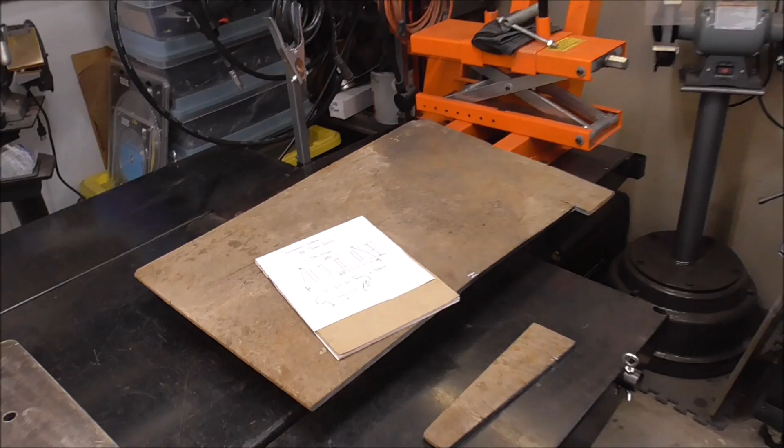I'm going to try to keep this build really user-friendly, using the minimum amount of tools so that you can get the most amount for your investment. So pretty much the tools we're going to be using for this are a welder and a plasma cutter. I'm going to have a set of plans and I'm going to upload those onto Facebook. These aren't them, but I'm just kind of showing you a sketch of what I've got.

Roughly how big it is, 20 inches across the back, 23 across the front. We're going to have some slices in it to let airflow come up through. It's going to have 3-inch sides, probably at about a 15-degree angle, but I'll have to verify that. And it is deep-wise 12 inches.

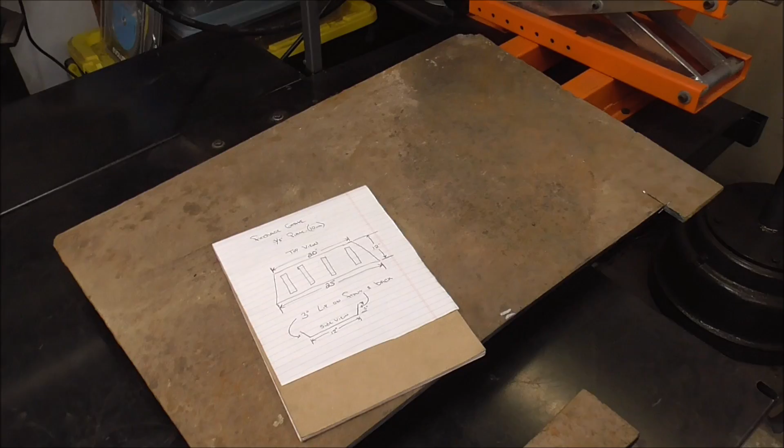You guys can make some pretty good money. Go online and Google fireplace grate. They range anywhere from like $30 for something cheap up to $750. So there's money to be made in these, especially if you can pick up some plate that is otherwise useless for something else. As you can see, this plate is all warped up. You can see how it's got a lot of bends in it, but that's going to be perfect for doing a fireplace grate like this because all it's got to do is hold fire.

I'm always looking for ways to show you guys different ways of doing something, things to think about, and maybe even some ways to make a little bit of extra money to better your circumstances. This could easily be made and sold online. Like I said, some of these go for $750. And there are people out there that are willing to pay for quality that don't want to have to deal with replacing their fireplace grate every year like I have to do.

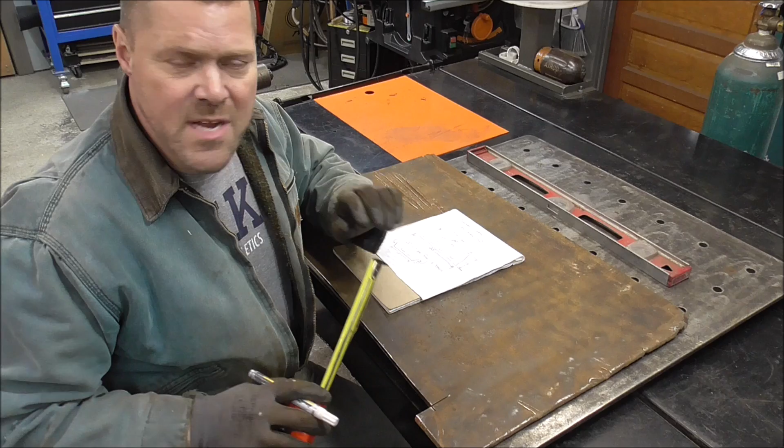Let's get going. As we do this project, I'm going to show you the tools that I would use to get the most amount of money out of these if you're going to build them, or the way to do it that will cost you the cheapest. Basically, you're going to want a plasma cutter and a stick welder. That's going to be the best way to do it. The consumables for a stick welder are the cheapest, and it's going to work great for this because it's 3/8.

If you decide to use a MIG welder, you're going to have to do this with a 220 volt machine because this plate is 3/8 thick. A 120 volt machine just really is not cut out to go past 1/4 inch, and that might even be pushing it with flux core. So that's why I say a stick welder is the best way to do it. You could do this with a DC buzz box, or you could do this with an inverter stick welder, using 6010 or 6011 rods depending on which welder you're using.

So for visuals, we'll get this thing laid out 23 inches. We'll make a mark there, and we'll make a mark on this side. Now I'll just use a straight edge and connect the two. And then it's going to be 12 inches deep, so we'll put a line across that way. 12. We'll get all our pieces cut, then we'll do all our welding.

These are also great projects, guys, if you're starting out welding with very little liability. There's not a whole lot of liability in building something like this. If your weld cracks or if it fails, nobody's going to get hurt.

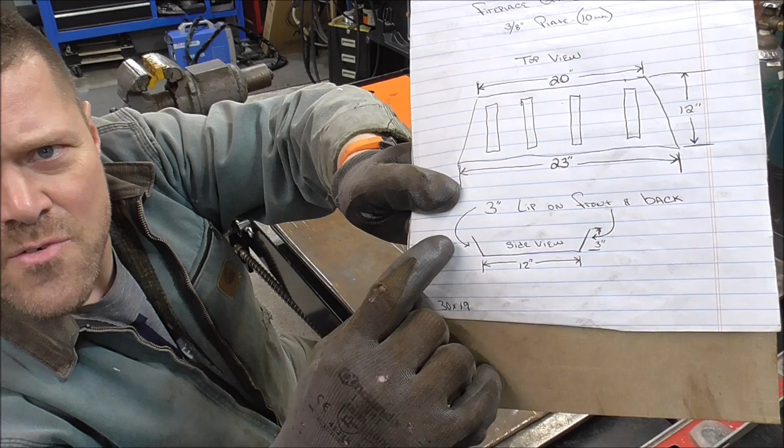So this will be the bottom of our fire grate. These will make up the sides because these little lips right here need to be 3 inches tall. So that'll be two 3-inch strips out of this. That'll go at probably a 15-degree angle, but we'll have to figure that out.

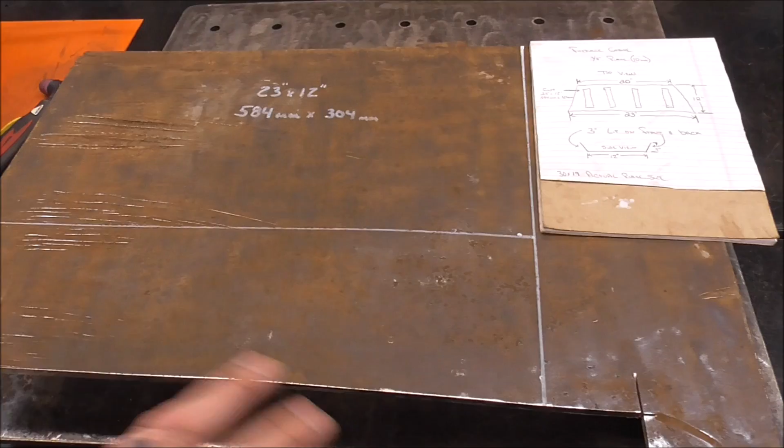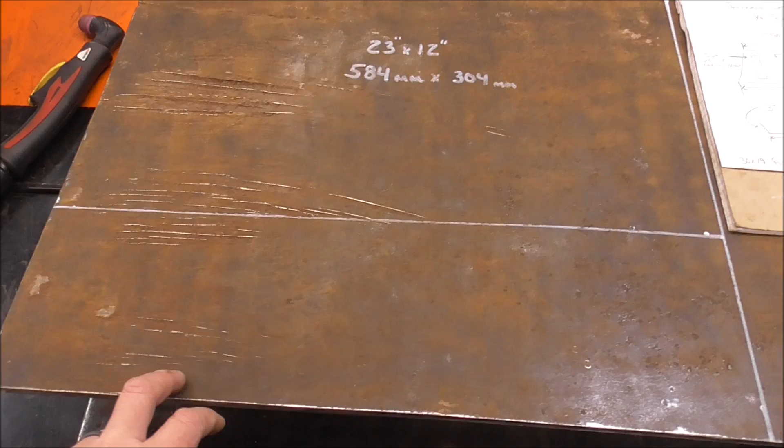And when I upload these plans, I'm going to make it so that you really don't have any waste. So if you have to either buy the plate or you look for it, you'll know the minimum size that you need. And we're going to try to minimize how many cuts we need to make, because obviously the fewer cuts that we make, the longer our consumables will last, which means that we're going to get more out of our consumables and make more money.

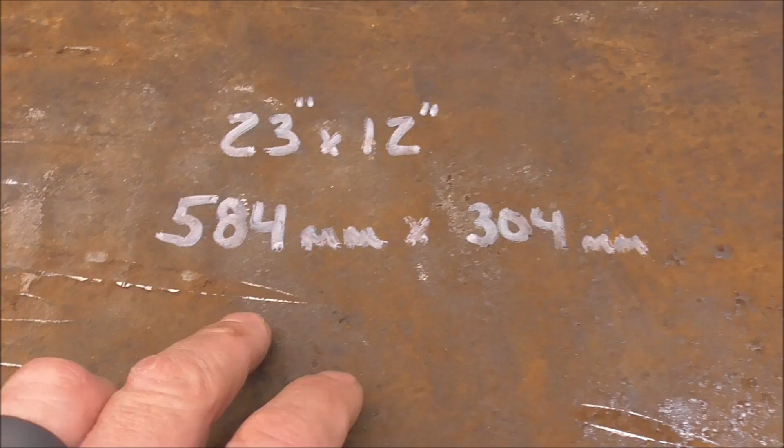First thing we're going to do is I've marked out how big this plate is. So it's 23 by 12. That's our first piece that we're going to cut. And that's what it converts out into for metric. And then that leaves us about 6.5 inches left over approximately. And we said we wanted each of these like 3 and 3.

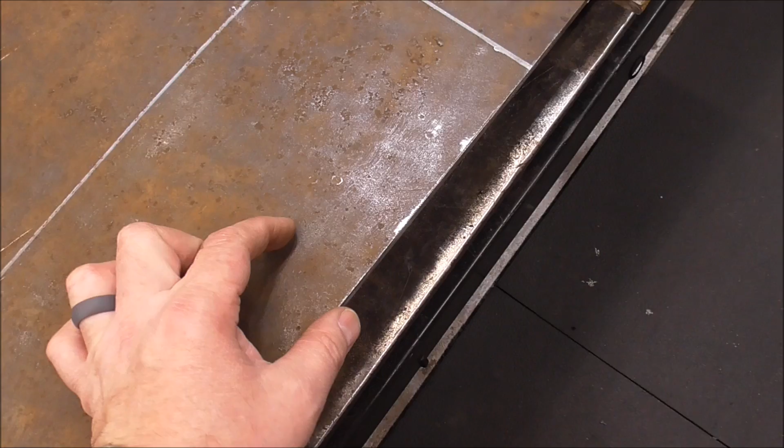What we're going to do is we'll make this cut first, and then whatever this is, we'll just divide it right down the center, make one cut, which will give us 2 pieces, and then that'll be the angled side, one for here, one for here.

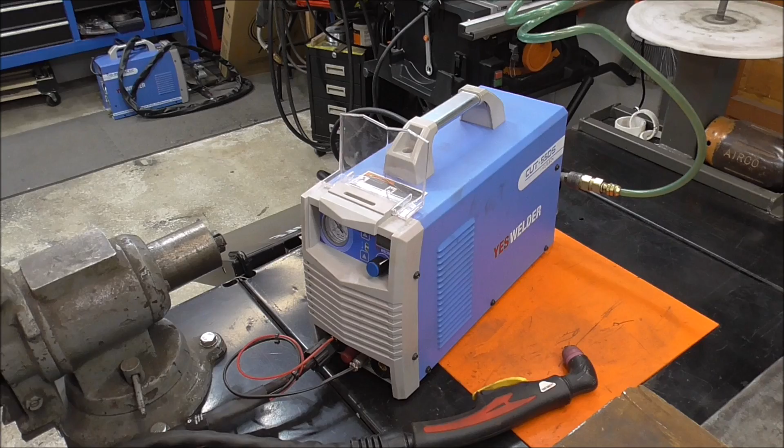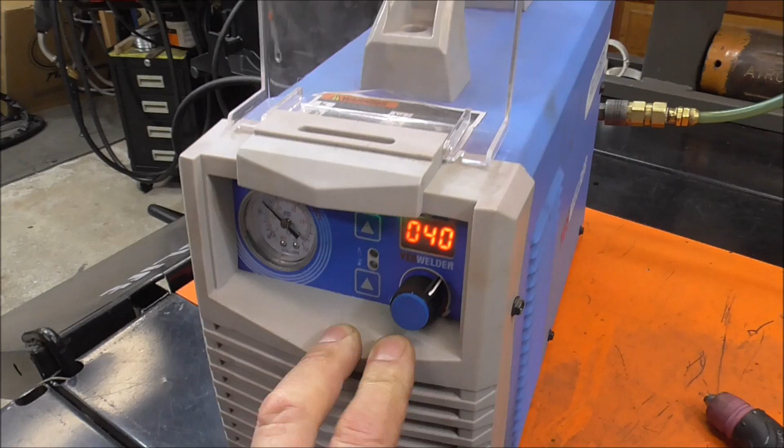Now we need to set this machine up for the correct air pressure and for the correct amperage setting. Just like you wouldn't take a cutting torch and max it out fully for sheet metal, you want to do the same thing for this because it maximizes your consumables.

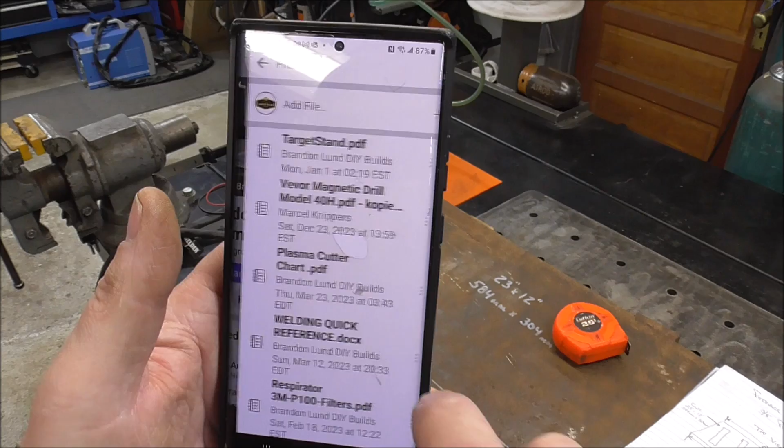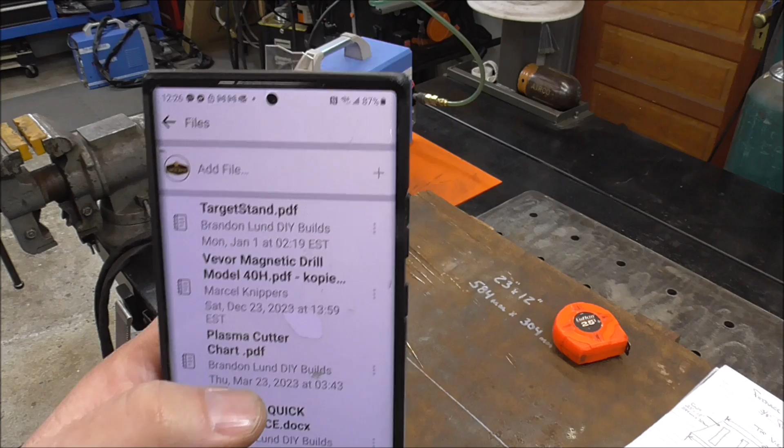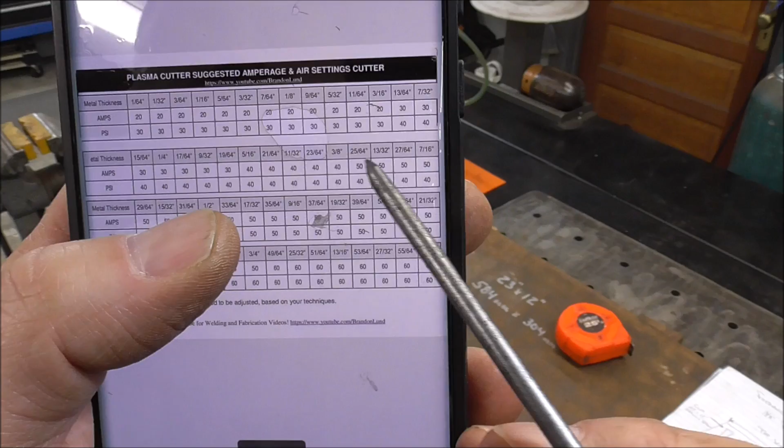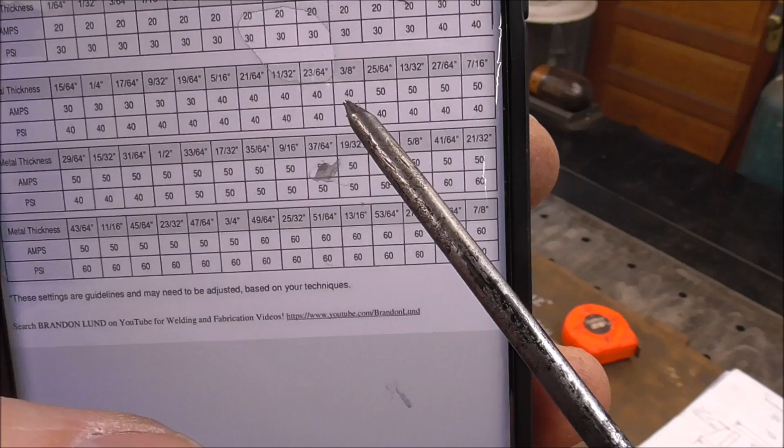What you're looking for is the plasma cutter chart. You're going to go in there, click on it, you're going to download it. Then you're going to go into the folder wherever you keep your downloads and find the material thickness that you're working with. For us, we're working with 3/8, so you can see we need to set it for 40 and 40, so 40 amps, 40 psi for 3/8 metal. And you come over here and you can see we're already set for 40 and 40. That'll just help preserve your consumables.

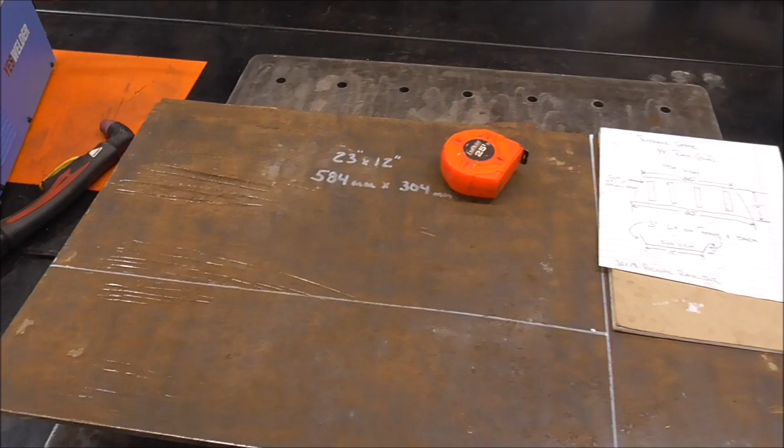In last week's episode, I showed you that I used a 7 1/4 inch circular saw with a metal cutting blade to cut this plate steel, and it cut just awesome. And that's good if you're going to do just a few cuts. If you're going to make a lot of these, I'd recommend a plasma cutter because, in my opinion, a plasma cutter is pretty much the ideal tool for cutting plate. And it's probably one of the cheapest ways of doing it because the only thing you're buying is consumables after a while.

So you've got, you know, $265 invested in this machine. You're going to need a few consumables. It helps to have really dry air with a plasma cutter.

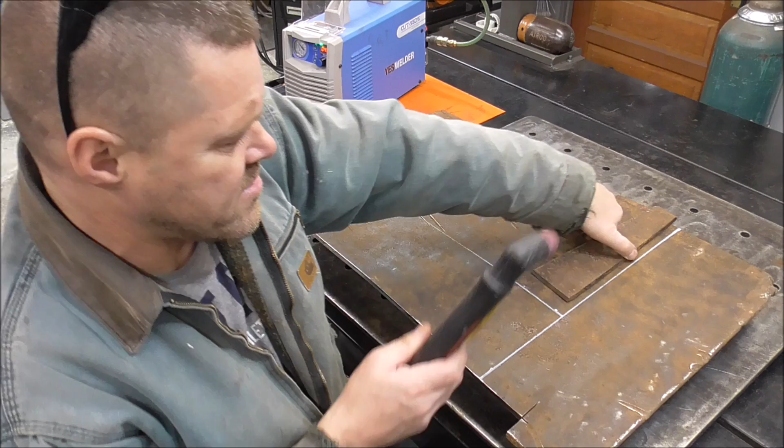I'm going to put on some cutting goggles, and I also like to use a shield just because sparks fly, and you're going to want welding gloves. And you're also going to want a respirator because it's not good to breathe in these fumes.

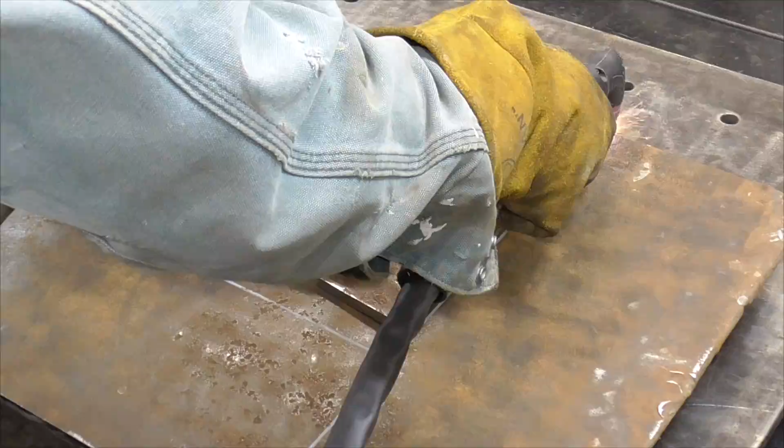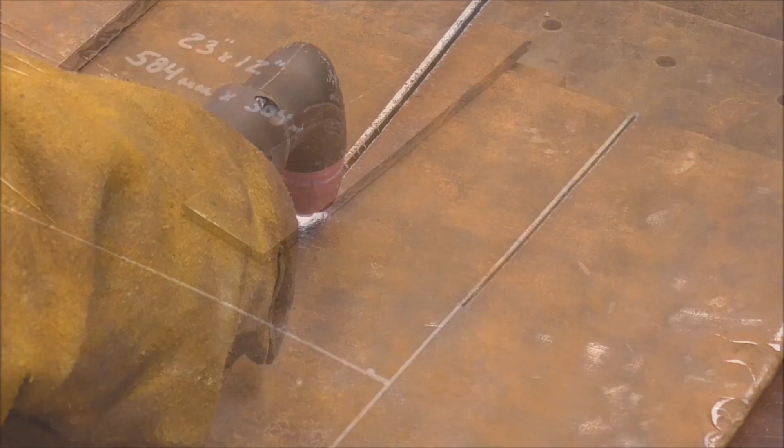I wanted to stop this cut real quick and show you why I took that spacer off. For one, this plate is super bowed like I told you, and it was making the gap higher and higher as I started sliding it down. But look at the kerf. So the kerf is real wide right here as I slide it along, and then look how thin the kerf gets right there. And the reason for that is that's where I was dragging it.

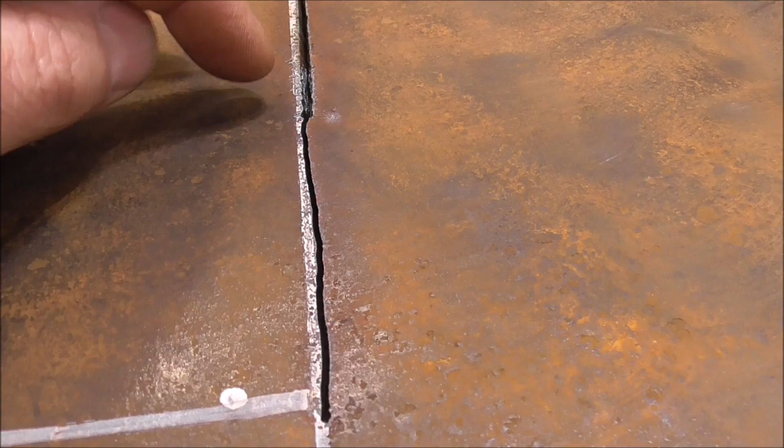By using that spacer and having it off the metal a little bit, it's acting like the metal's actually thicker. So the machine is not piercing it as cleanly. So I'm going to drag it because I'm getting a faster, cleaner cut. If this plate was a lot flatter and it didn't have all kinds of bows and waves, this would be a good way of doing it using the straight edge, but this plate is just too jacked up to do that.

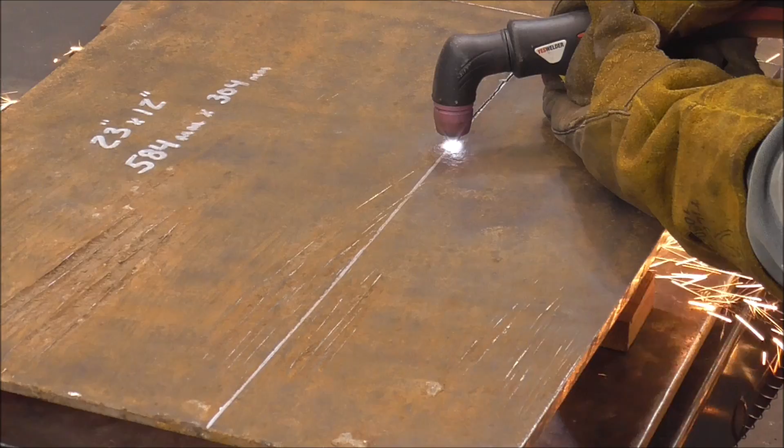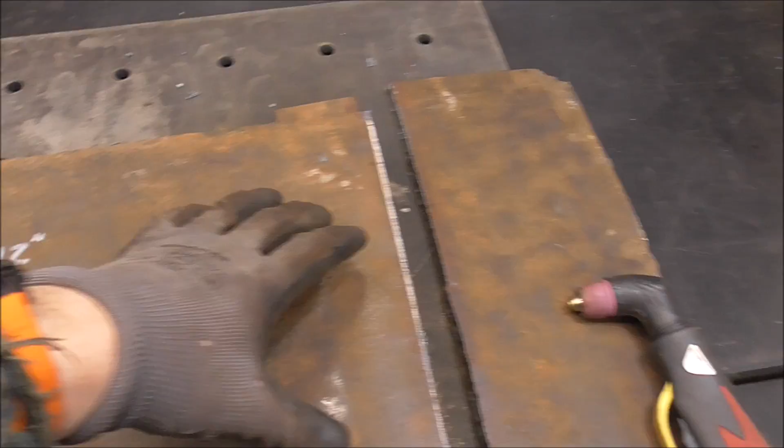So here's our bottom right here of the fire grate. Then it's going to have the squares cut out, and we'll do that eventually. And then here's the scrap. Now we're going to take this scrap and just cut it right down the middle, just to make things nice and simple. It reduces the cuts that we got to make.

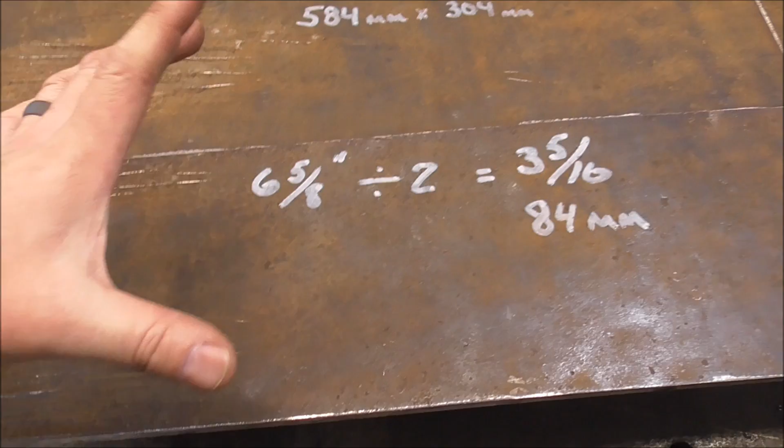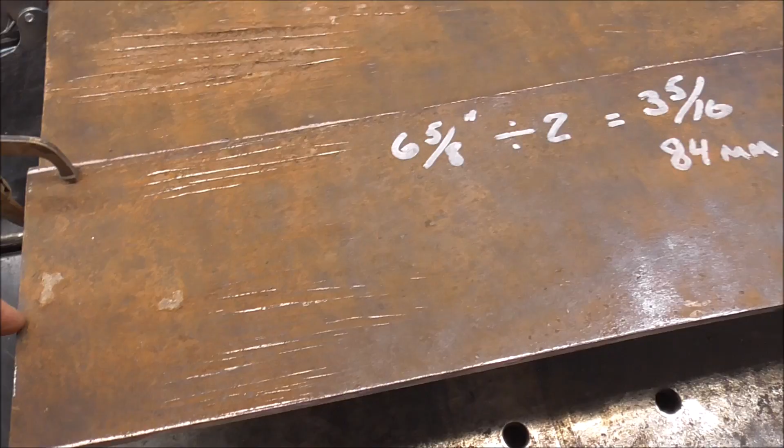The scrap that we have left over is 6 5/8 wide. Divide that by 2 and that gives us 3 5/16 or 84 millimeters. So we're going to put a line at 3 5/16 or 84 millimeters, draw it right down the full length of it, make one cut with the plasma cutter, and that'll be both sides.

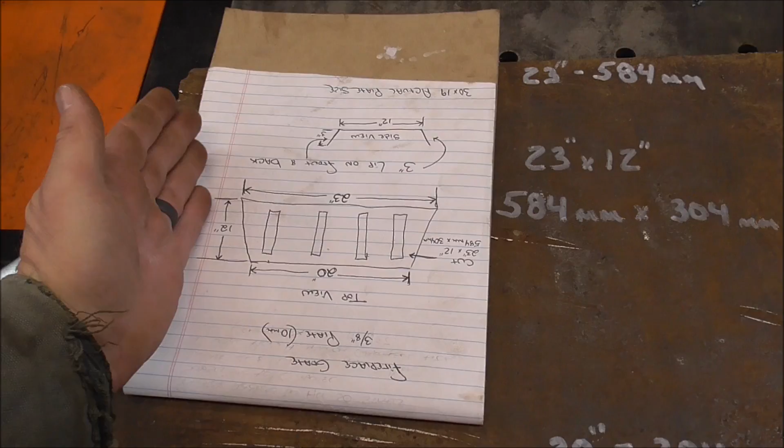So now we've got our 2 strips cut that are both 23 inches long or 584 millimeters. Now we're going to go back to the bottom of our plate for our fire grate. So this is how we're looking at it right now. We got 23 inches along the back right there, and we need it to be 20 inches along the front. So to get that measurement, we're going to come in 1.5 inches and make a mark, which is also 38 millimeters. Do the same thing on this side. Come in 1.5 inches, 38 millimeters.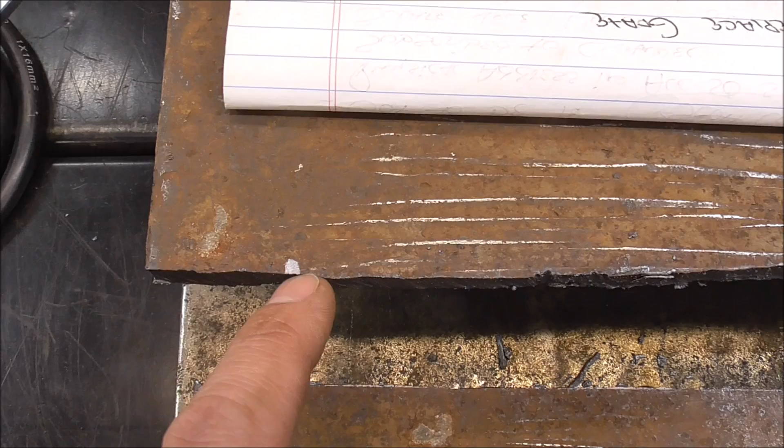Then we're going to draw a line from here up to that edge. That'll give us that taper that we're looking for right here and right here. And then we'll have to make one of these plates right here 20 inches long to match what this will now be. This will now be 20 inches inside to inside, or 304 millimeters.

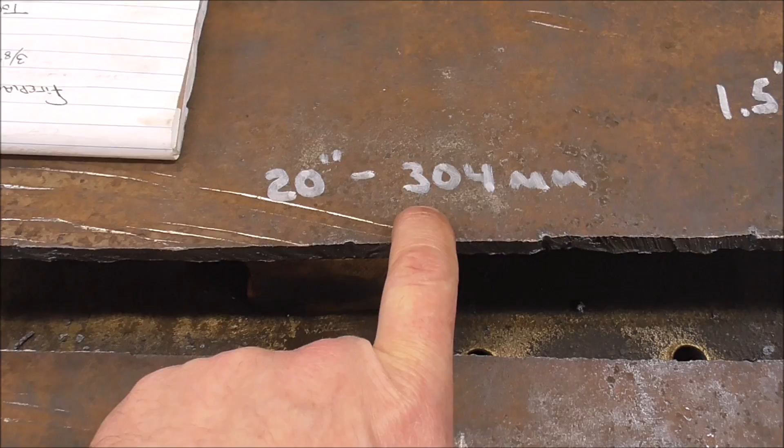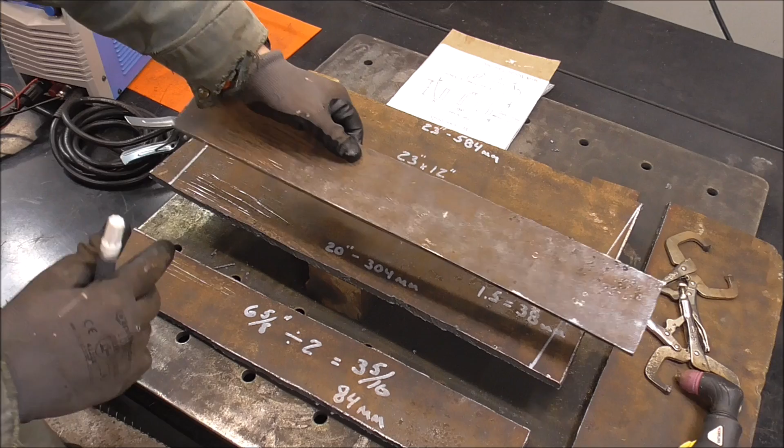And while we're doing this cut and this cut, let's cut that to length as well. So we know that it's going to stop there, it's going to stop here. So let's just hold it up, put a mark right in line with this mark here on the plate, and we'll cut this off straight across right there.

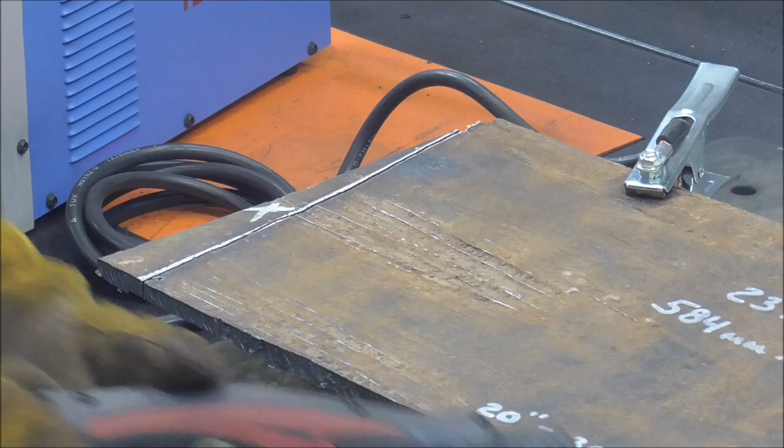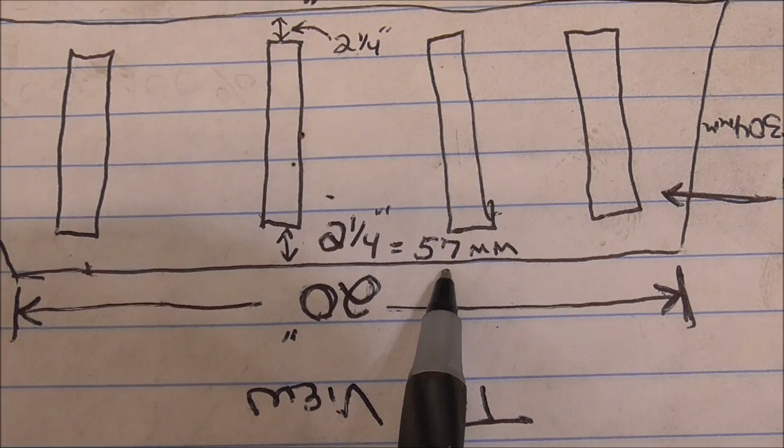Now we need to put in the slots onto this plate. So we need to know, where do they begin and where do they end? Because obviously you can't go all the way to the end, because it would cut it in half. So I'm going to use 2¼ inches or 57 millimeters. How'd I come up with 2¼ of an inch? That's the width of this.

This line that we just drew with that level, from that edge, we're going to come in 2 inches. I'm going to use a piece of 1.5 inch wide square tube as a template. Okay, and that's what I'm going to trace out. Those are going to be my slots.

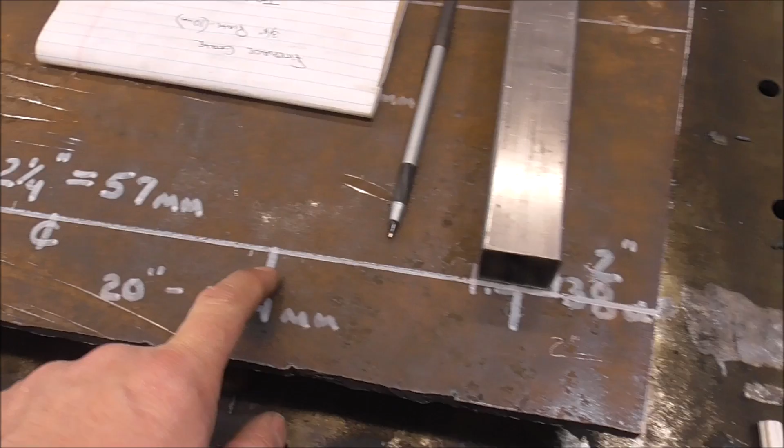Okay, so from the center of this tube, we're going to make a mark every 5 inches. So it would be 5 inches, which is also 127 millimeters. Another 5 inches will be the tube, then another 5 inches. So that'll give us equidistant slots all the way down through this.

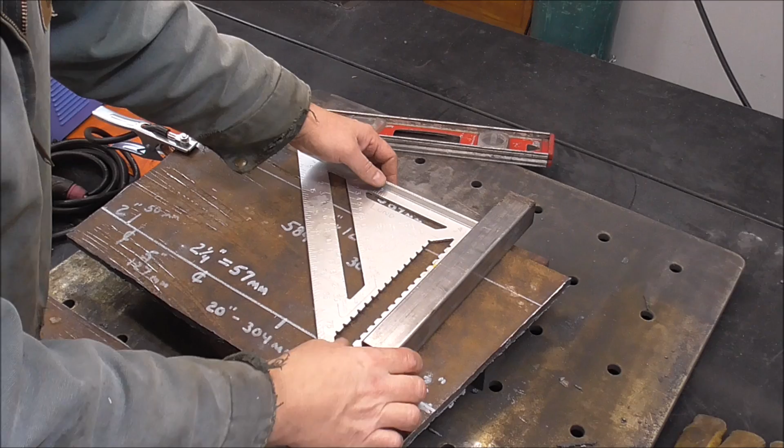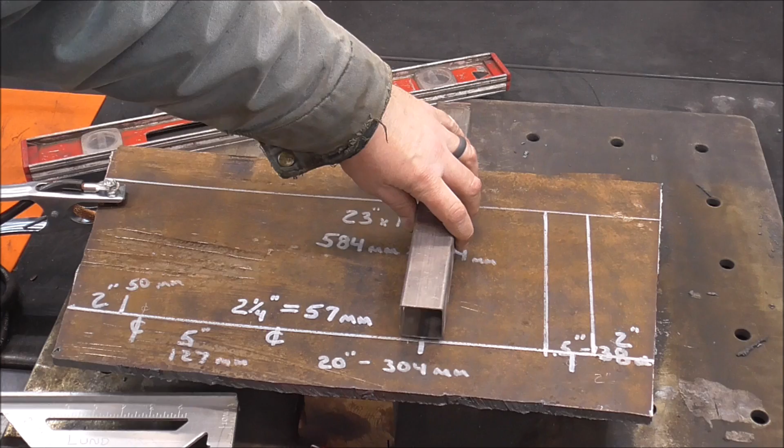And to keep my line somewhat straight, we'll use a straight edge. I'll bump it up against this plate right here. I mean, they don't have to be perfect. Like I said, this just has to hold fire, right? Check it for 2 inch, that looks great. We'll move this over, line it up here to my center mark, which is 5 inches away from that. Put my framing square on it. You can see I gotta come over a little bit, and there we go.

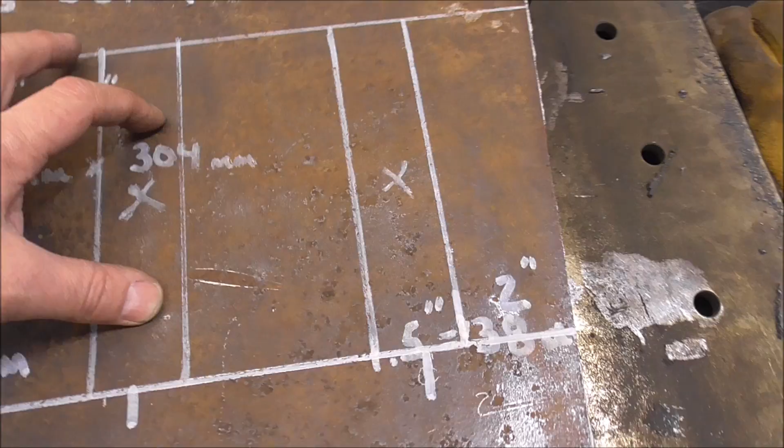And now, just like all the others, we're just gonna cut out these slots. Cut out that, that, and that. These could actually be cut up and made into legs if you wanted to, and maybe we'll do that. I haven't decided. I kind of was just going to go for some square tube just for the looks, but I don't know. Maybe we'll just keep it really inexpensive and use these cutouts for the legs of this.

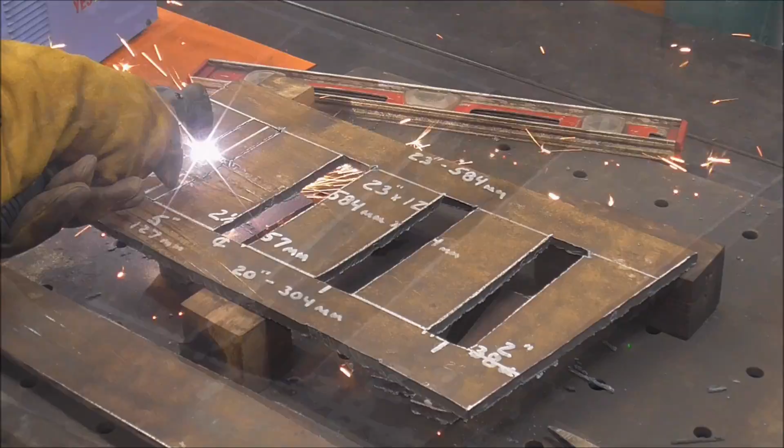So we're ready to start welding. We still have to figure out if we're going to use these pieces that we cut out and use them for legs. I'm leaning towards that. I actually think it would look pretty good if we did, and it would be cost effective if you guys are building them. You see this on here, this little ridge that's all around?

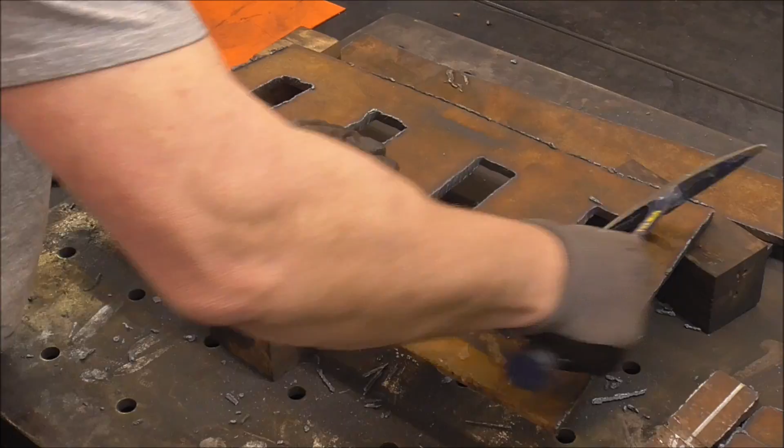That's called dross or slag, and what we've got to do is knock that off, and that comes off really easy with a chipping hammer. And that's all we've got to do to get ready to weld is knock off this dross. And you can see, watch how easy this is. Hopefully you guys can hear me okay because I'm wearing a respirator right now. What I'm going to do is go around and prep this edge so we can get it down to bright shiny metal so we can make our welds.

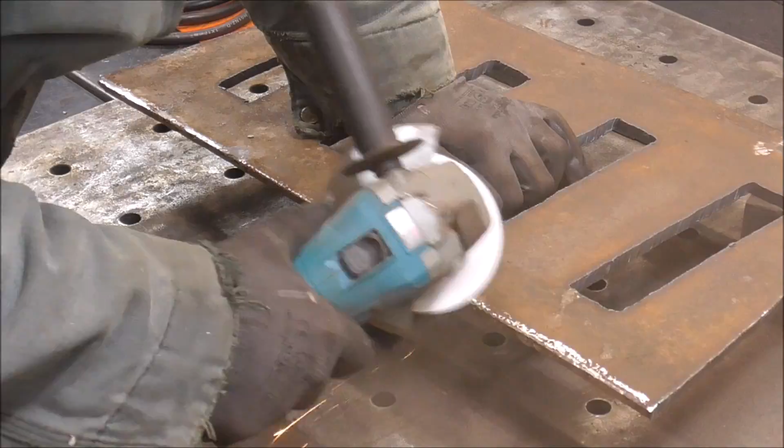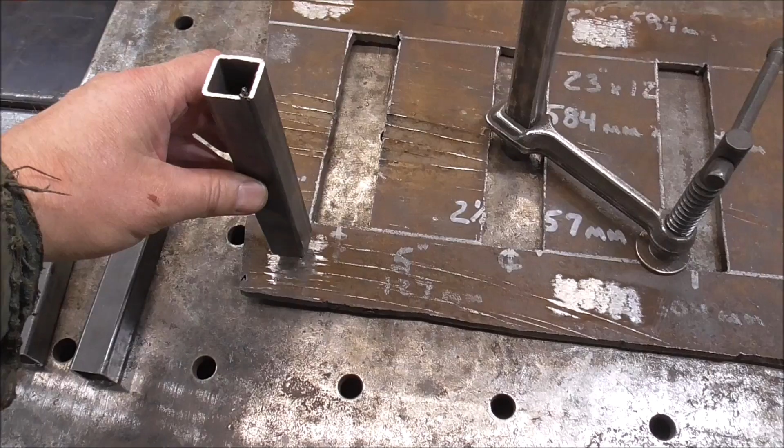I think you guys are going to like how we're going to do this next part. It's going to be pretty slick and it's going to save a lot of time. So these I am going to make into legs, but not for everywhere. I've got some 1-inch square tube laying around. So I'm going to do square tube legs on the front like this, just so it looks a little bit fancier. It's going to be short, so you won't really see them all that well anyways. And then where you don't see these, I'm going to put legs here, here, here, and then in the center of these ribs so they can't bow.

Then once we get the legs welded on, we'll get them all cut to length. That's where it's going to save some time. So I'm going to make a jig and it'll mark them all, because you can see, look how warped up this is. You can see this isn't even off the ground. This is like the thickness of my finger. It's not even flat. Then over here, it's touching right on that very edge. And then over here, it's even thicker. So what we're going to do is measure off our table and then just make a line and make it even all the way around.

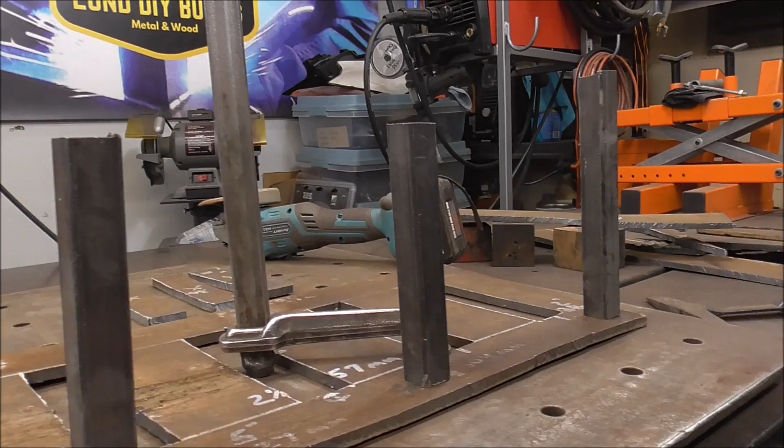I'll show you. It'd be pretty slick. As I said earlier, the most cost-effective way to weld this up would be to use some 6011 or 6010 rods with a stick welder. That definitely is the cheapest way to go. It's the cheapest way to purchase the welder, for one, and it's the cheapest consumable that you can get. The next, probably cheaper, would be to use a flux core welder.

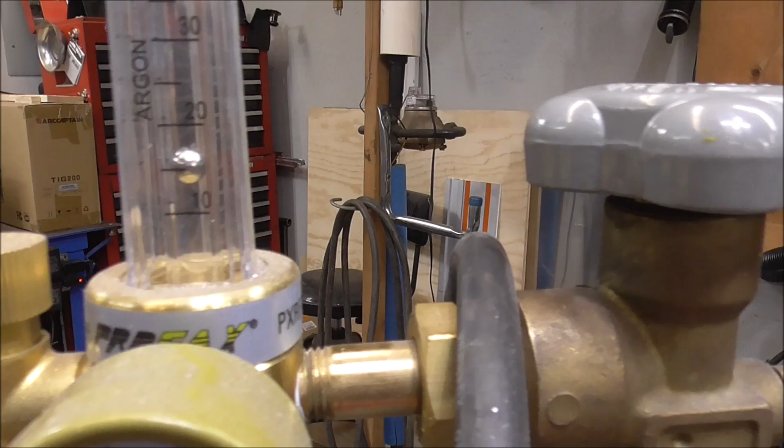But I'm not going to use a stick welding process simply because it's cold outside right now and I'm working inside. And as you guys know, stick welding makes a lot of smoke. If it was summer where I could open up the door and get more ventilation, I would definitely stick weld this. But it's winter time, so I'm actually going to MIG weld it. For CFH, I'm running right about 15. We're running at 194 amps or 555 inches per minute, 27.6 volts.

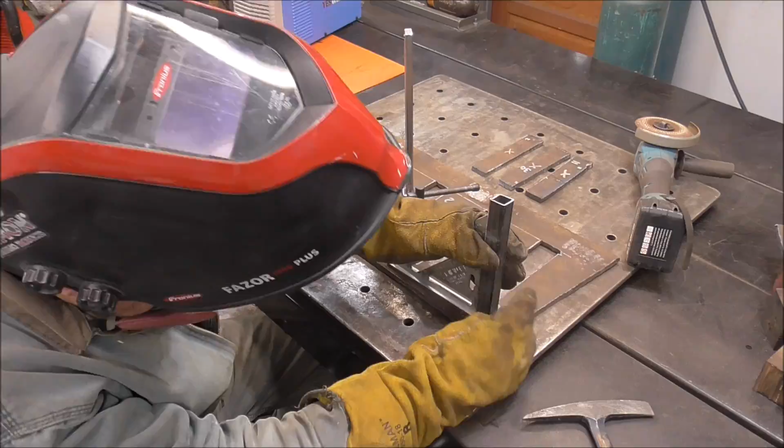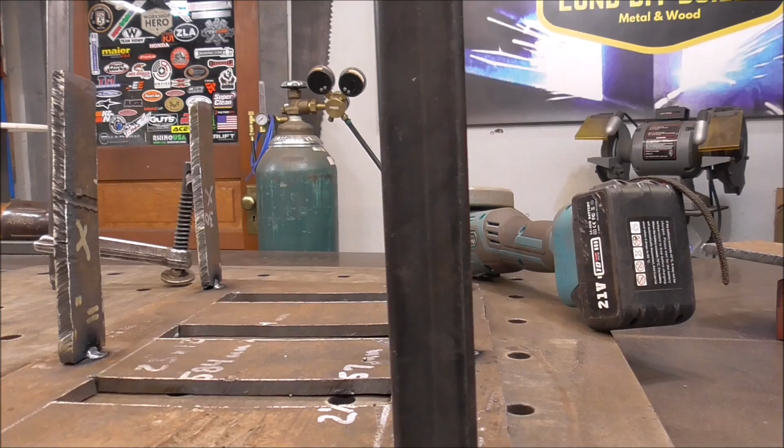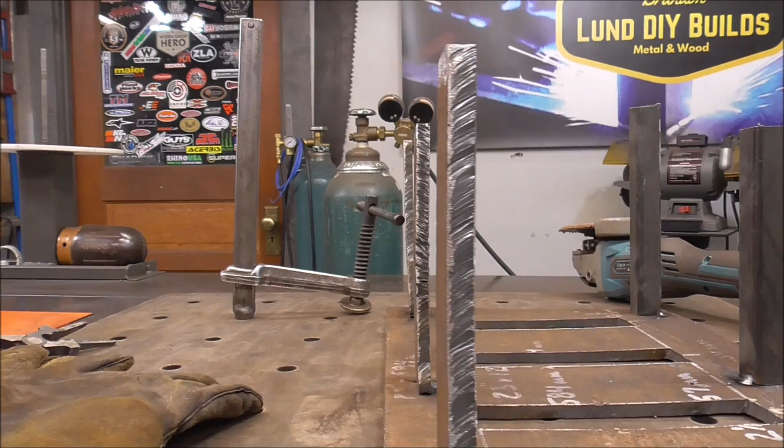Now these ones, guys, you're not going to really see. So you can try to get them as perfect as you want, but you're really not going to see any of them. Alright guys, these are the ones I measured. Look down them. Those are pretty darn straight for what it is. These are the ones I just eyeballed and guessed. Those are pretty straight too. So sometimes it really doesn't much matter, guys, as long as you get it fairly close. And the more you do this stuff, the better your eye gets anyways.

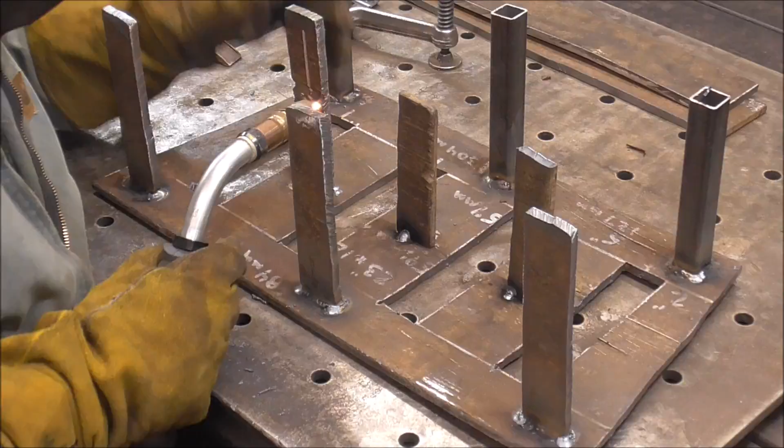So now let's put a tack here, here, and here, and then just a couple more tacks on those over there. Then I'll get these all welded out. Then we'll cut them off so they're all even. Now we're going to flip this over and we're going to weld on our ribs on the front and back. Then we'll cut our feet. That way if there's any warping or anything, it'll all have been welded, so it'll be warped to where it's going to warp. Get yourself a magnet and then you can do it this way. Just like that.

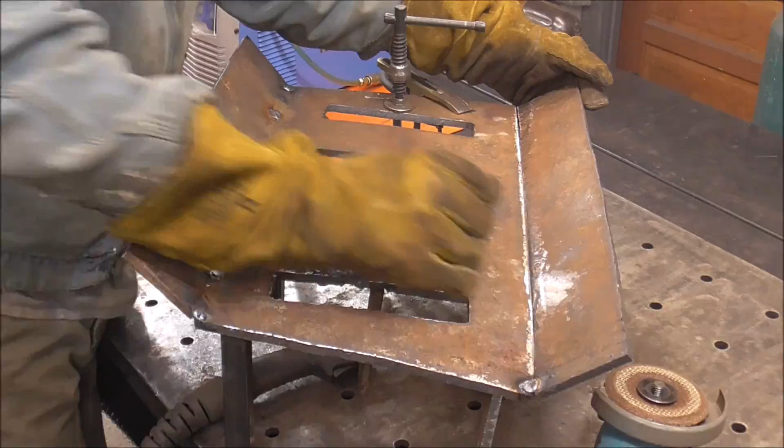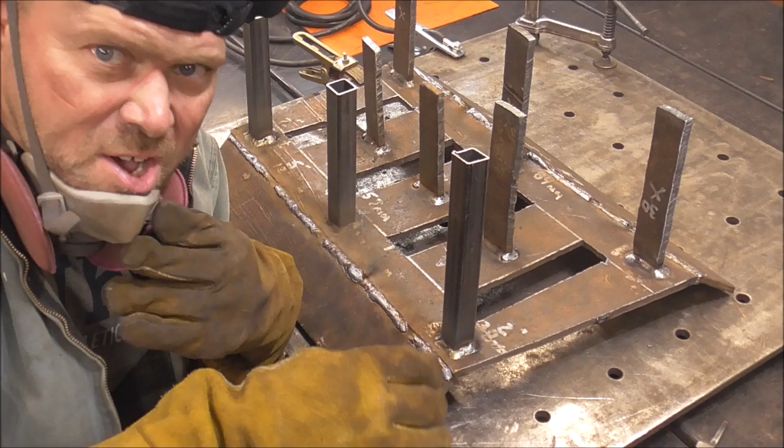Alright, all we've got to do is weld the back side and then cut the legs, and we are just about done. When we're all done with this, guys, and we get this all cut, I'll throw this on a scale. This is really, really heavy duty. We're all welded out, guys. Not the prettiest in the world, but you know what? It'll do. It'll work. And that's really all that matters. This side came out good. I got all kinds of wormholes and porosity over here. And you could actually hear it when I was running it. That's basically just trash inside there because I didn't clean it enough. But like I said, it doesn't really matter, guys. It's not the end of the world. This was a pretty rough plate.

If this was actually a nice flat plate and I had some good material to work with, I probably would have taken my time a little bit more. But I'm basically just doing this so I can have something for myself, and then I can make some plans for you guys and show you how to build one of these cost effectively and be able to make a little bit of money while you're doing it. Kind of looks like Stonehenge over here with all the different height legs. Now we're going to make them all the same, and I'll show you how we're going to do that.

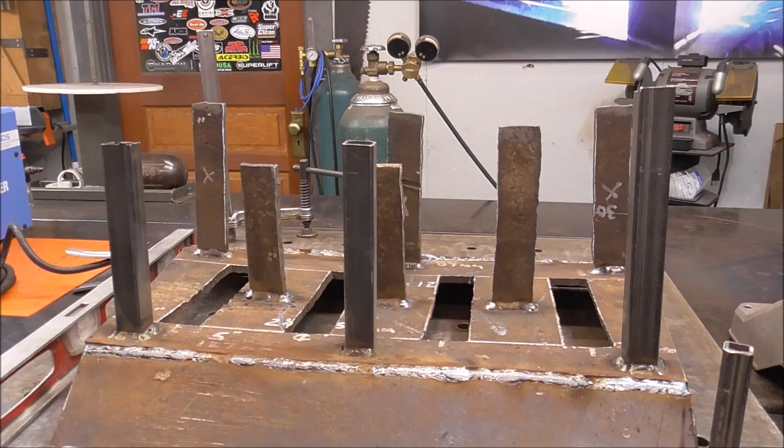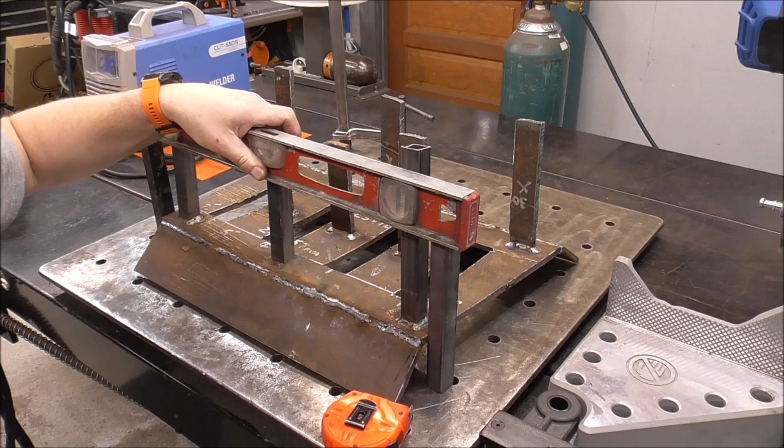Now I've got a couple scrap pieces of metal that I'm going to set on either side of this, just like that. Then I'm going to set my straight edge right on top of that, and that's going to give me a nice straight line that I can trace to make all my legs perfectly the same height. There's the line we've got to cut them off at. Do the same thing for the middle row.

And by doing it this way, guys, doesn't matter if one of these is leaning this way a little bit, it's going to be flat all the way through the way it should be. Now we could easily take the plasma cutter and cut all the way through this. But as you can see, I've made a nice crisp line because I want to get it fairly straight so that it doesn't rock. And that's kind of hard to do when you're doing it on tubing.

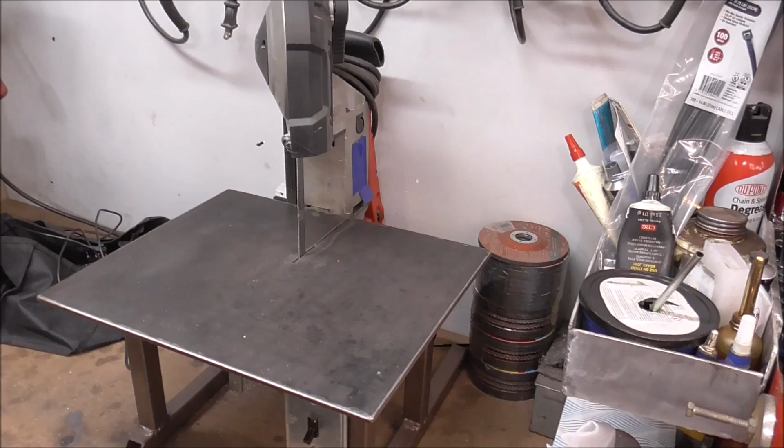So what I'm going to do is I'm going to use my portable bandsaw. So this is my portable bandsaw, but I have it set up as a bandsaw table. And I'm going to show you now how easy this is to take off. I don't take it off very often. So this loosens up. This clamp stays on here all the time.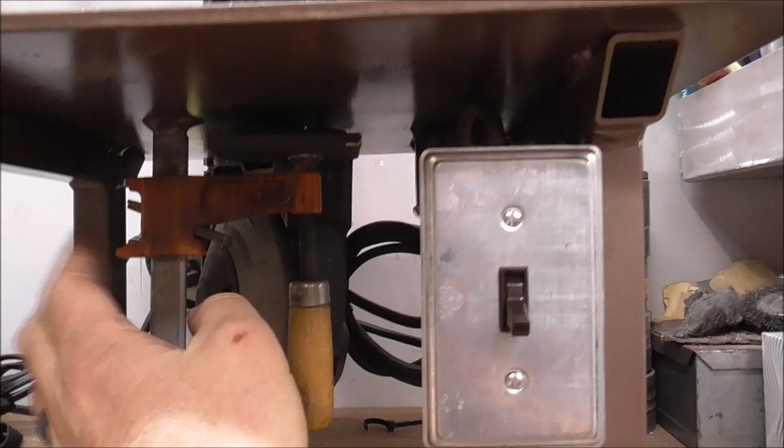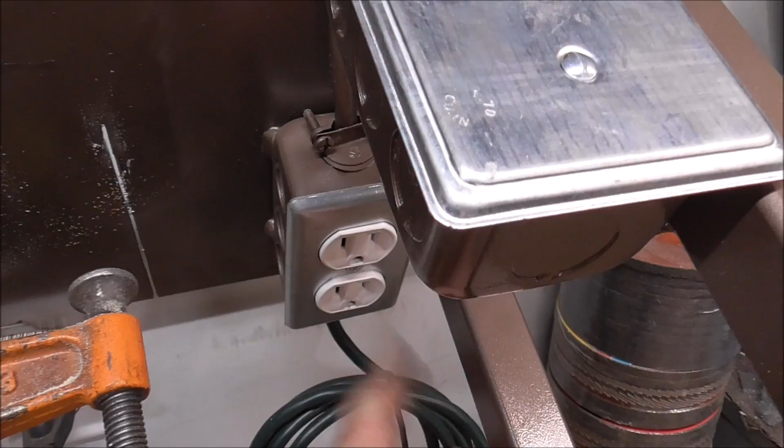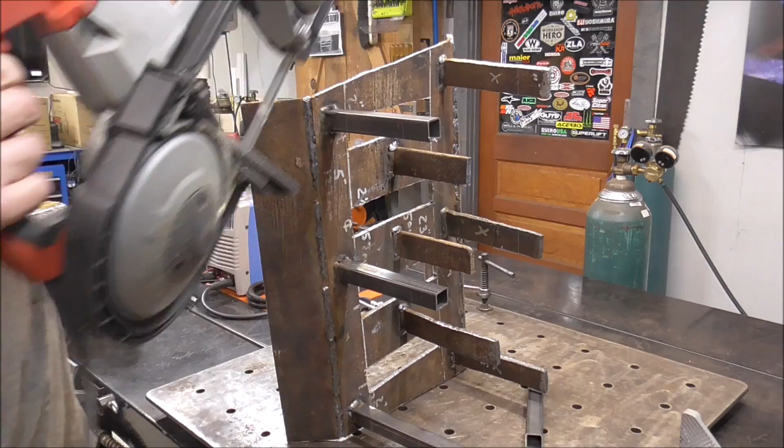Then back here, here's the plug-in. That unplugs the saw. When you turn on this switch, it powers up this outlet. When you turn off the switch, it turns off the outlet. Now the saw will come right out and just pulls out like that. Now I've got it turned up on end so I can let momentum do its work, and now we're just going to chop it off. Look at that, no wobble, guys.

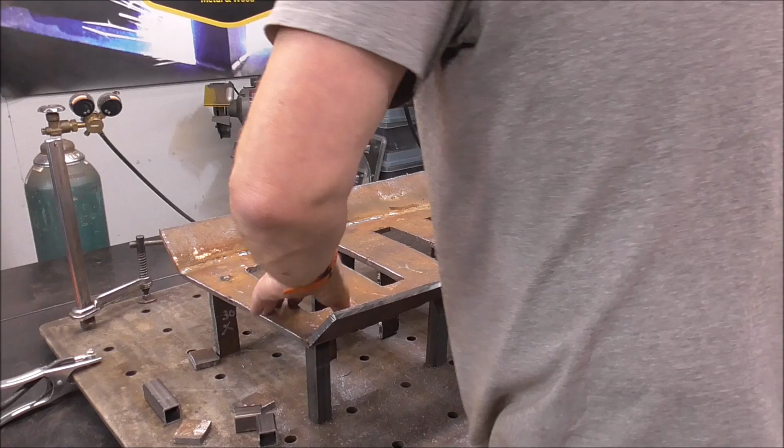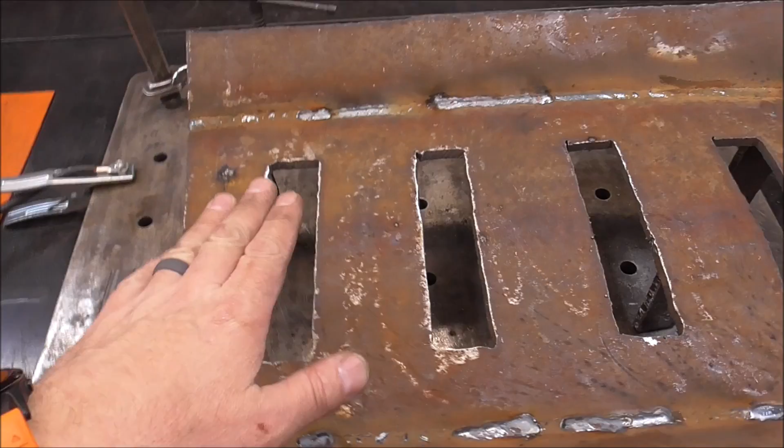So when you open up the fireplace, this is pretty much what you would see. You wouldn't see it very well though, just because it's kind of dark in there. But you can see how now these feet are all touching, and when this gets glowing cherry red, because it'll have coals down under it that are heating upwards, these legs down here are going to keep this from bowing down in the middle and sagging.

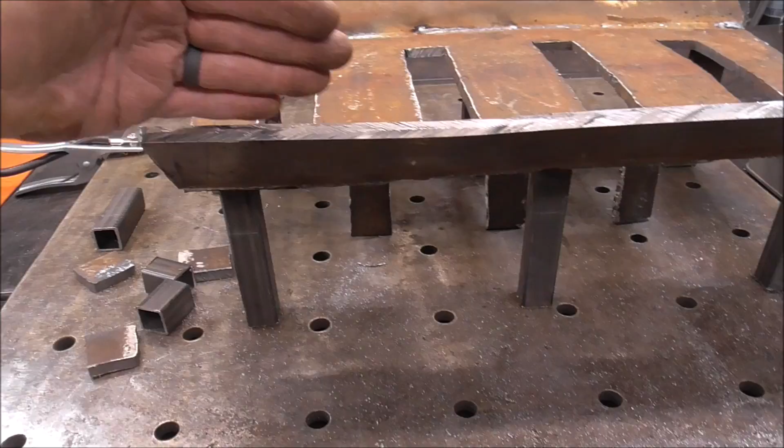Same thing from the middle. This little strong back is going to help it from bowing. So this should last a really, really long time, guys. And these are all the little pieces that we cut off at all the oddball lengths.

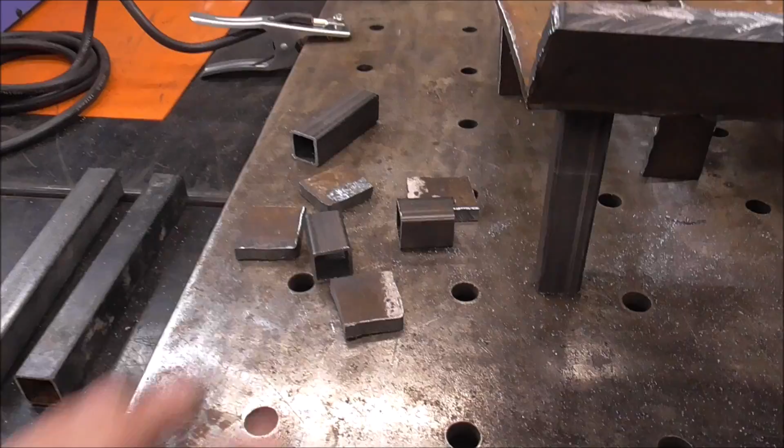And this is how you polish up a turd. I shouldn't say that. That's just a figure of speech.

In all seriousness, it's a good idea to always finish everything. Paint it, looks good. It's going to burn off anyways, but it just shows that you took a little bit of extra time. And I rounded off the edges. I made sure that it doesn't have any sharp edges anywhere and that everything feels good. Came out pretty well. I'm happy with it.

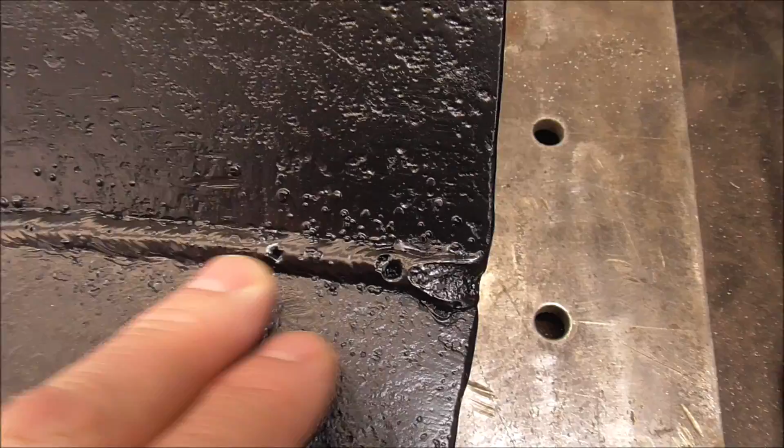You can see some porosity over here. That's got some trash in it. It's got some undercut here and there. That's pretty decent there. It's got some undercut here where there's some gaps, but not a big deal. It's going to serve the purpose that it needs to serve. Just like that, I doubt you'd ever see that that's thick tube, but I just like the idea of having the tube on the front.

And then, like I said, these flat plates back there, when this is glowing cherry red, that's just going to keep that from bowing down. So this should last a lot of years. And there's also some other things that you could do, like on the front of this. If you wanted to put your name in this, you could stencil out like family and then cut it out with a plasma cutter.

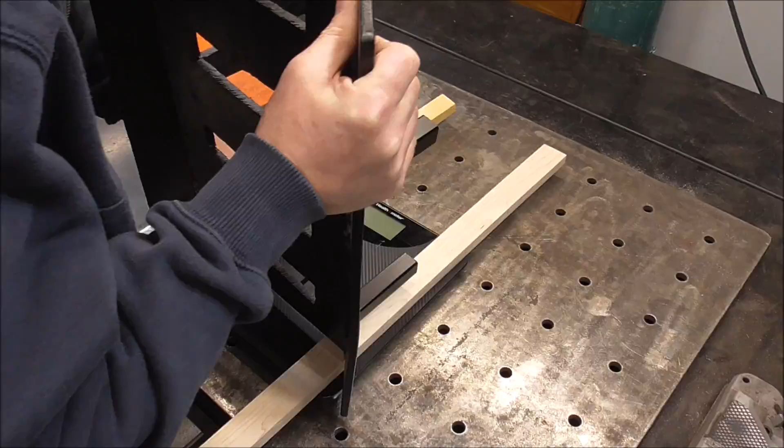There's all kinds of cool things you could do. Put your last name in there just to make it custom. This is just to give you guys some ideas, and maybe you guys can make a little bit of money making these and selling them online or locally on Facebook Marketplace. That is heavy, guys. Check that out. 46 pounds. And that's all there is to it, guys.